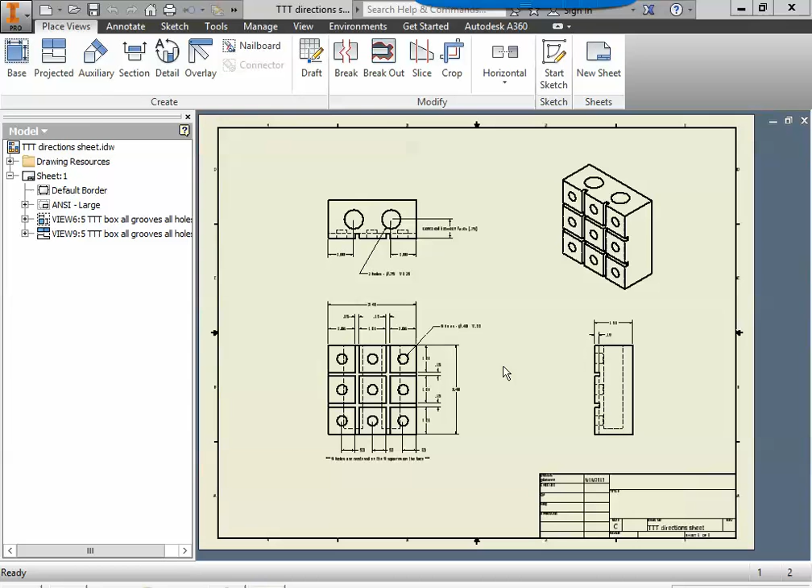Welcome to day 3 of Tic-Tac-Toe Inventor 3D Solid Modeling. So far what we've created is a box with our two vertical grooves. Today we're going to look at creating the horizontal grooves. These grooves are very similar. There's just one little difference in how you're creating them so that you can make it go from vertical to horizontal. So let's take a look at this.

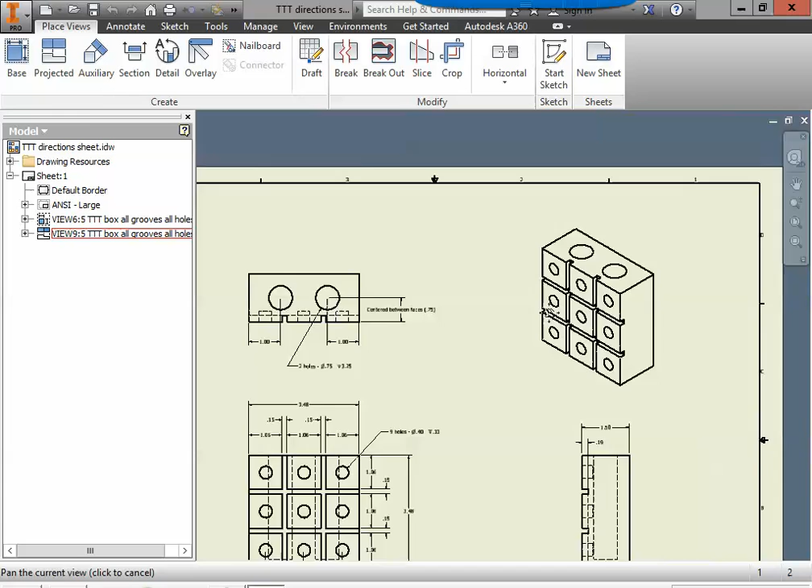Step 1, let's open our part. Come to the quick open icon, drop down the look in and find your H drive, and then let's find our part. I labeled it TTT. You notice I have my box and my two vertical grooves. We can click open.

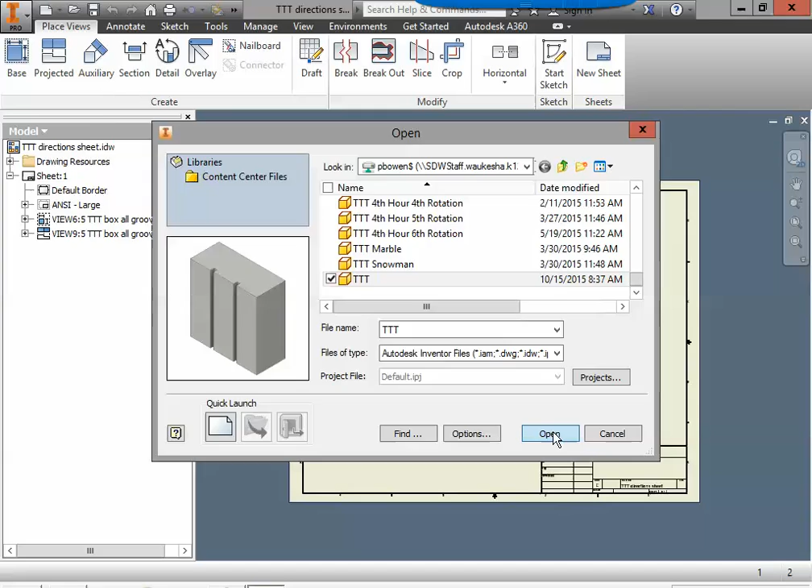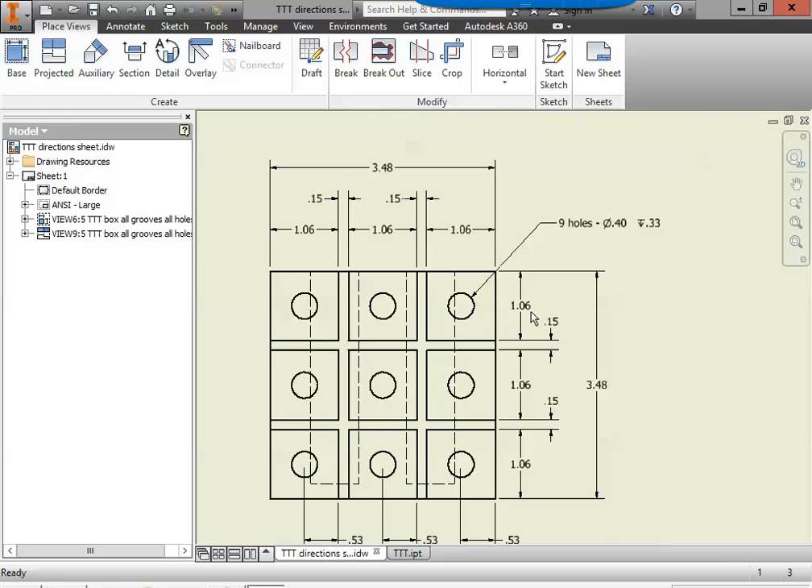Now, if we look at our sheet, you're going to notice that those horizontal grooves are also 0.15 inches thick. They're also located 1.06 inches from the edge, just like the vertical grooves were. So let's go back to our part. We're going to start a 2D sketch, and we have to do it on the front. Now this time there are 3 different squares we could select. For simplicity, let's all just select the left one, although you could do any of them.

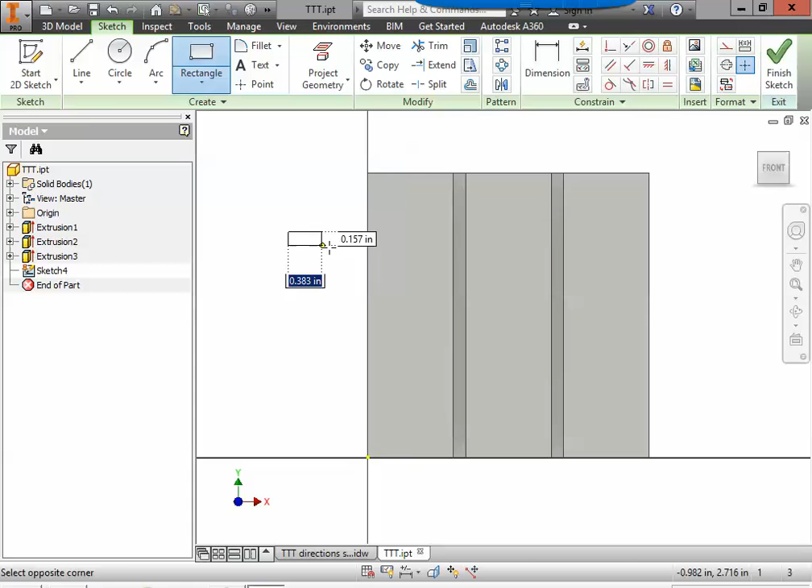So now we're going to put a 2-point rectangle on our part. And we're going to start this time in no man's land to the left. I'm going to click once to place one corner of the 2-point rectangle, and I'm going to move my mouse to the right. Here is the trick to this. The trick is to first hit the tab key, and it's going to switch it from width to height. Now that I'm at the height, I can type in 0.15, and then I can hit the tab key to go back to the width.

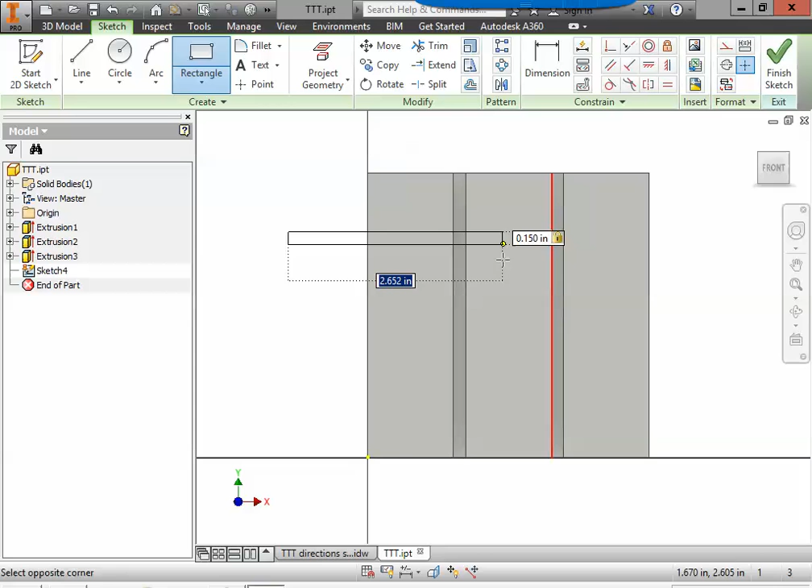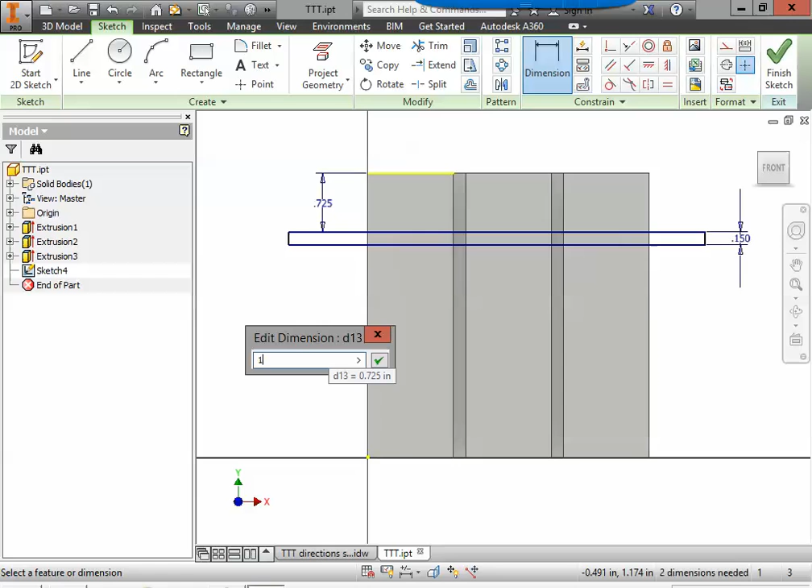So now we've selected how thick it's supposed to be, and now we have to figure out how long it should be. So we're going to take our mouse and go over to the right until it's longer than our piece, and click to place it. On your keyboard in the upper left-hand corner, you can hit the ESC, escape key, and now we have to throw in a dimension. We are going to put a dimension from the top of our part, click, to the top of our groove, click, and we're going to take that number and place it over to the side of our part. How far is this groove from the top? It is supposed to be 1.06. Enter.

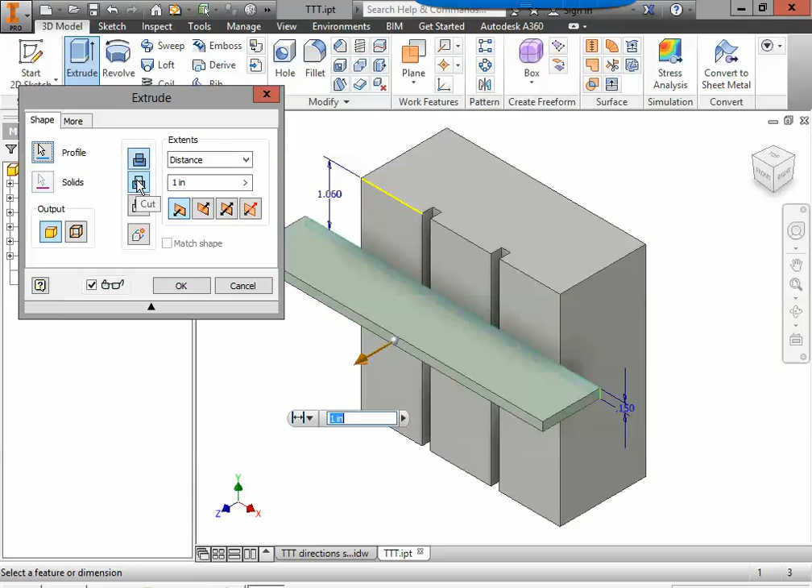Now that you've created that horizontal groove, it's the right thickness, it overlaps our part, and it's placed in the right location, we can finish our sketch. We can tell it to extrude, and it's going to start by poking out. So we're going to tell it to cut in and verify that the arrow is pointing in, not pointing out. Make sure it's pointing in. And then we're going to change the number. How deep is it supposed to go? Based off of our sheet, we know that the grooves, all of them, are 0.19 inches deep. So we're going to type in 0.19 and hit OK.

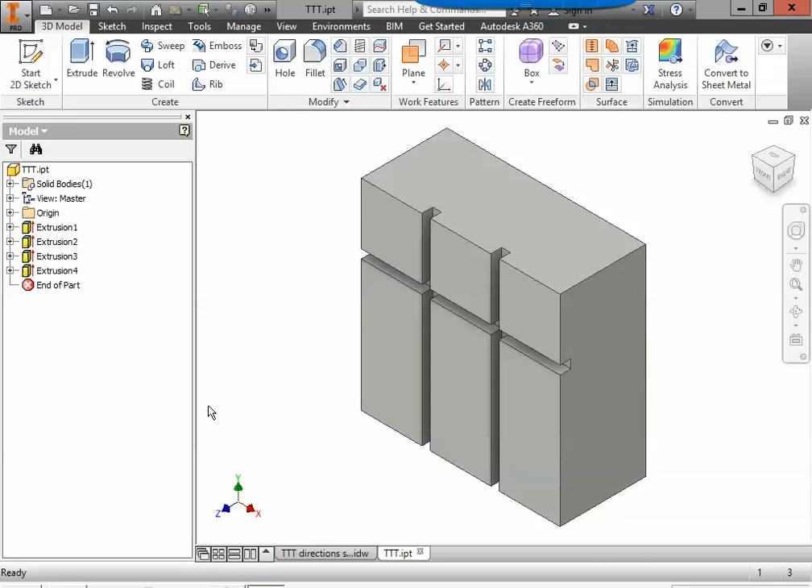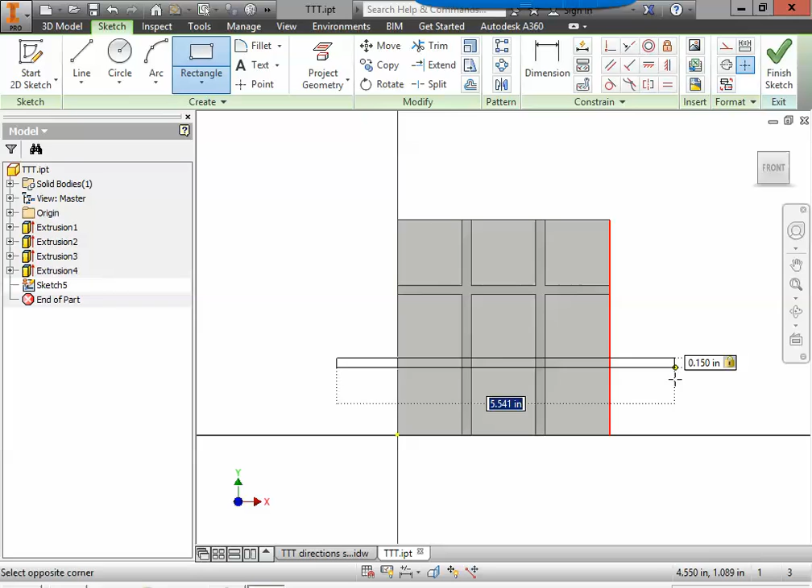I'm going to do the other groove for you again. I'm going to go a little faster this time. Feel free to pause and restart if need be. I'm going to start a 2D sketch on this lower left corner and click the front. Then I grab a 2-point rectangle and I start in no man's land and click. Immediately, I'm going to hit the tab key. I can type in 0.15 for the thickness of my groove, and then hit the tab key again to go back to the width. The width needs to be longer than my part. Once it is, I'm going to click to place it, and then hit the escape key.

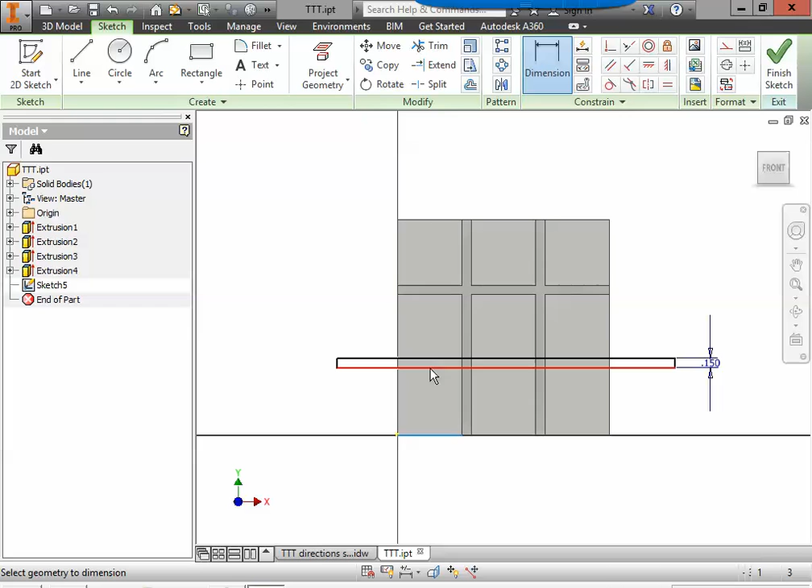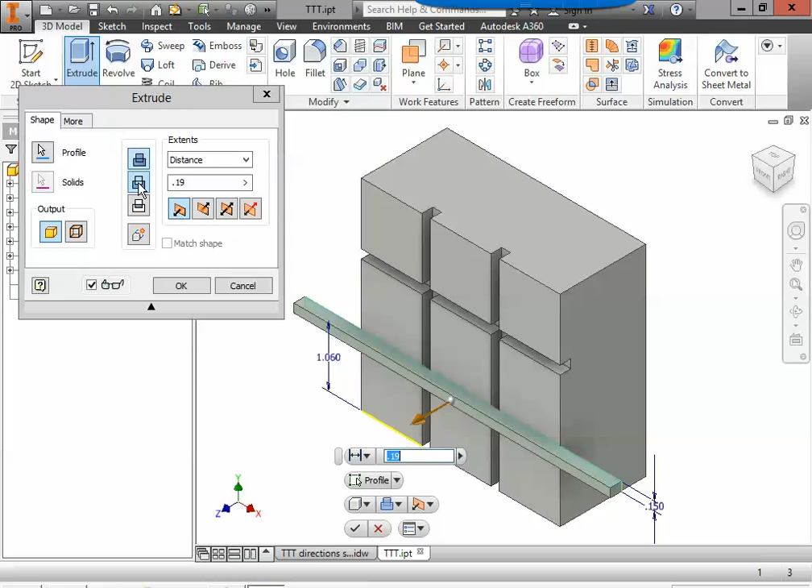Next is the dimension tool. We're going to dimension from the bottom of our piece to the bottom of our part. Oh, I clicked them both exactly how I should have, but it didn't exactly work. So I hit escape. I tried dimension. Let's try from the bottom of our part to the bottom of our groove. It worked that time. I'll place that dimension off to the side and type 1.06 and hit enter. Now that this groove is the correct thickness, it overlaps and it's located correctly, I will finish my sketch. I will come to the extrude button and I will tell it to cut and make sure it's cutting in. Again, lucky for us, we already set the depth before, 0.19, so we can just hit OK.

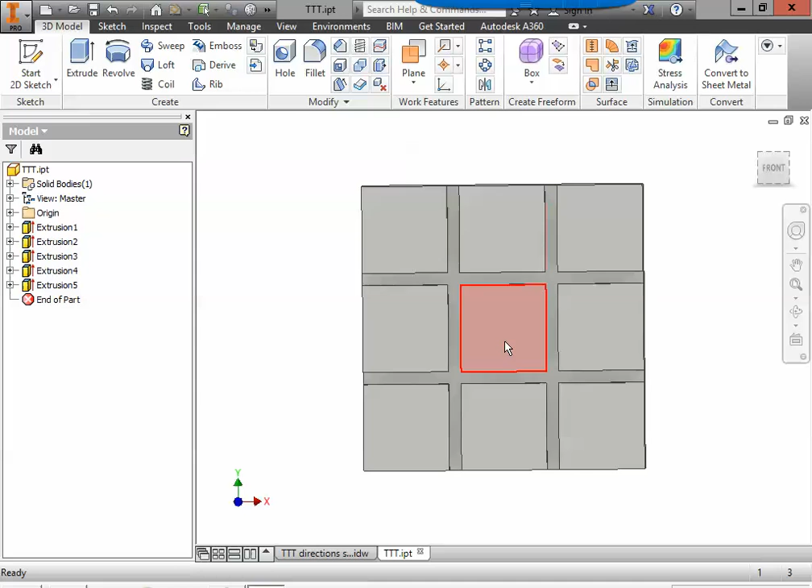Now we have all of our grooves located and placed on our tic-tac-toe board. All of these squares should be equal. And to finish the day off, we're going to save this. To save this part, all you have to do is come up to this quick save icon right here, click it, and it's saved.